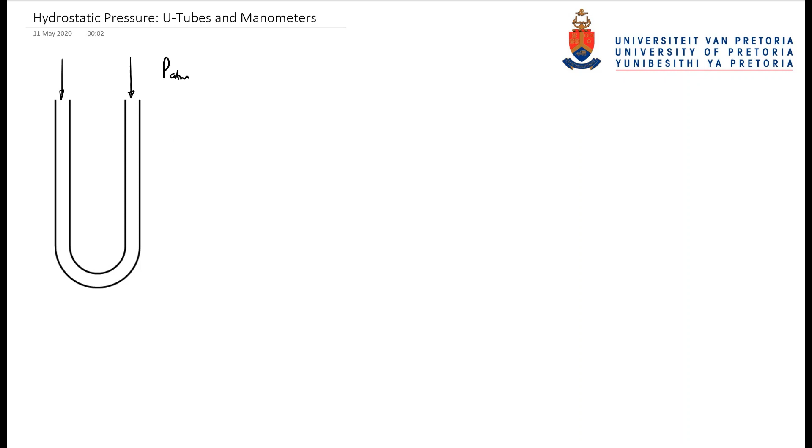So I could calculate here P gauge or P absolute, depending on whether I add the atmospheric pressure to the system or not.

So let's look at a closed manometer. Let's draw a closed manometer. I still have the atmospheric pressure, but I have a pressure inside the closed off end. There is still the pressure working into the manometer on the right hand side, or the right hand side leg of the U-tube.

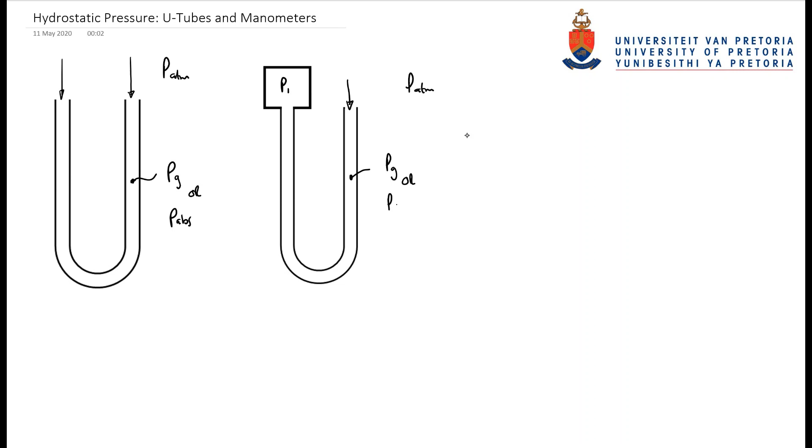If P1 is now given as a gauge pressure, for me to get the absolute pressure at P1, I need to add the atmospheric pressure. And for me to get the gauge pressure anywhere in the system, I can just do my calculations. But to get the absolute pressure anywhere in the system, I need to add the atmospheric pressure again. So I can get the gauge pressure or the absolute pressure anywhere in the system.

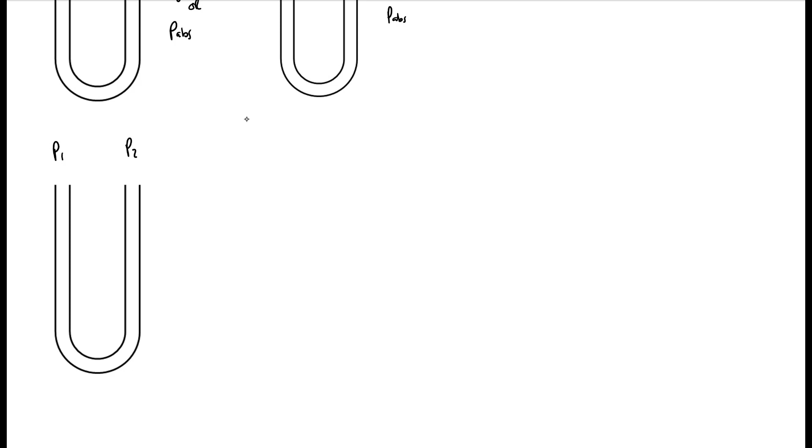Here we have a U-tube open on both ends. So for this system, let's assume on the left-hand side we have P1 and on the right-hand side P2 working on the system. We have an atmospheric pressure on the outside. In this U-tube, we now have a fluid that is at this exact height.

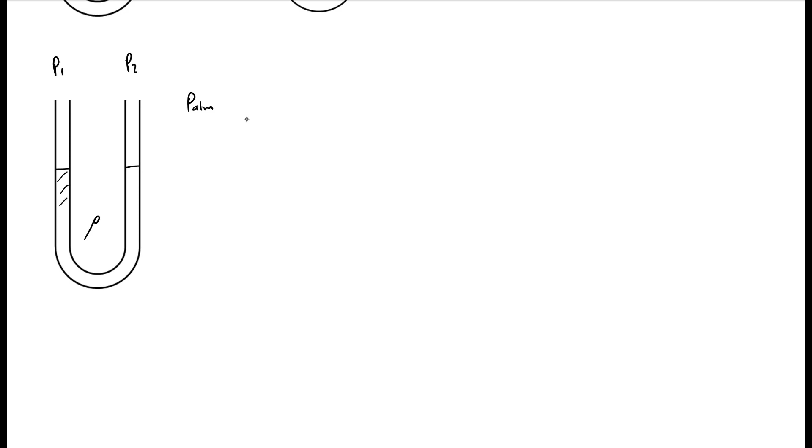The density in the fluid we refer to as rho. So there's my fluid with density rho in this manometer, and the height on the left hand side equals the height on the right hand side, and from where the fluid level is to the bottom we call that height H, and we want to know the pressure at the point right at the bottom, and we call this pressure P. Let's talk a little bit about the U-tube or the manometer before we start doing anything else.

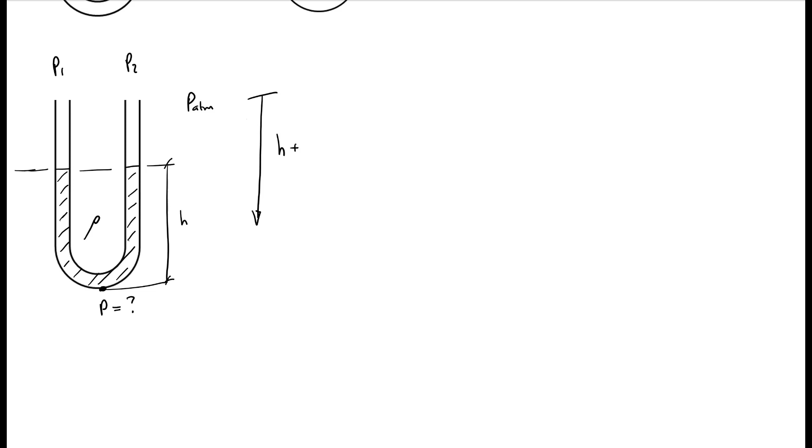So when we talk about pressure in a manometer or hydrostatic pressure as a whole, we always take the downwards direction as the positive H direction. This means that H will start at the top of the system at 0 and go down and be positive, which means that the pressure here would be gauge pressure 0. And as we go down and H increases all the way from 0 to the total length H, the pressure will increase with the rho GH equation we did last time. So this implies that the downward direction is also the direction in which the pressure increases.

Now for this specific system, if we're going to talk about the pressure at the bottom of the U-tube and calculate that, we're going to start there and calculate the pressure as we go down with the equation. So P will be equal to rho GH.

But my question now is, is this H on the left hand side or H on the right hand side? And that's actually very easy - it's both. Because both the fluids on the left and the right hand side is the same fluid with the same density, and because the left and the right hand side has got the same height, the two pressures are the same. Now that's easy to understand.

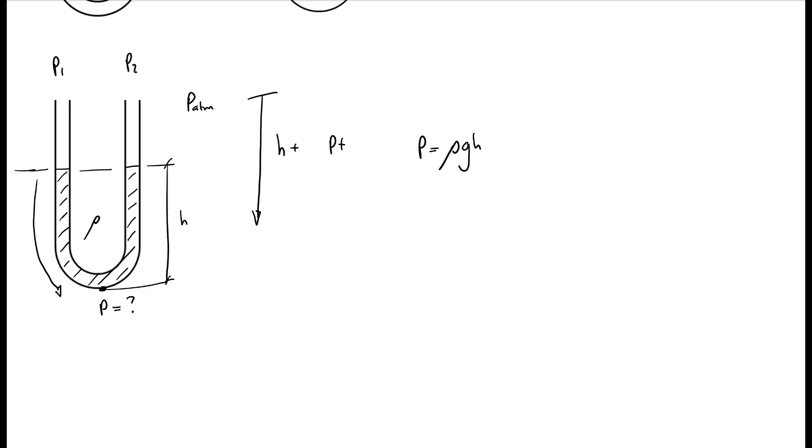What we can take from this is, when we want to calculate the pressure at the bottom, it's basically a balance of what's happening down the left hand side versus what is happening down the right hand side. So we balance the pressure whether it's on the left hand side or the right hand side to the bottom. In this case it's easy to understand because we've got the same fluid, they're the same heights, and everything.

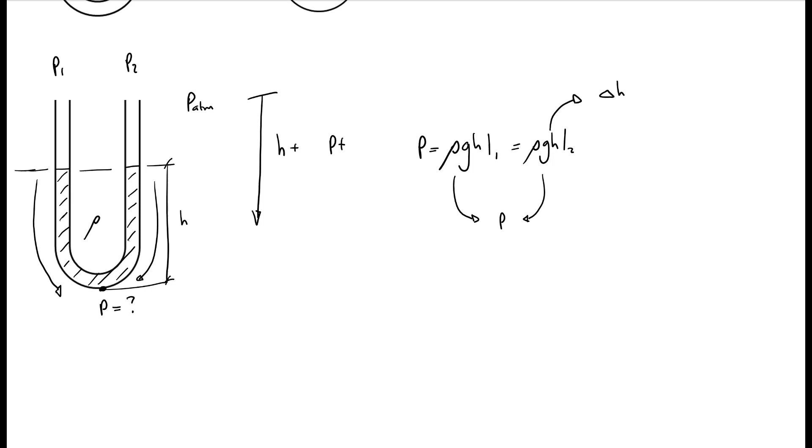So this is the same for the left hand side, it's the same as rho GH for the right hand side, which means that whether we start from the left or the right hand side, the pressure at the bottom P is exactly the same. Remember again, this H is actually delta H going from 0 all the way down to the bottom. So the pressure on the left hand side and the pressure on the right hand side, generated by the hydrostatic force of the fluid, is the same thing at the bottom, and they must be equal.

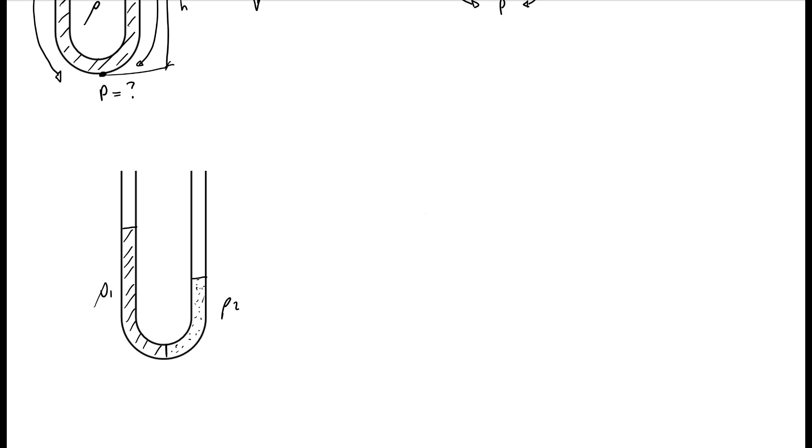Let's look at a system with two different fluids in it. We have a liquid from the top straight to the middle, and another liquid from there to the bottom. This is my first fluid with density rho 1, and this is my second fluid with density rho 2. We want to calculate the pressure at the bottom, so we have heights in the system: on the left hand side H1, on the right hand side H2. Both systems are open to the atmosphere, so we have atmospheric pressure on the outside.

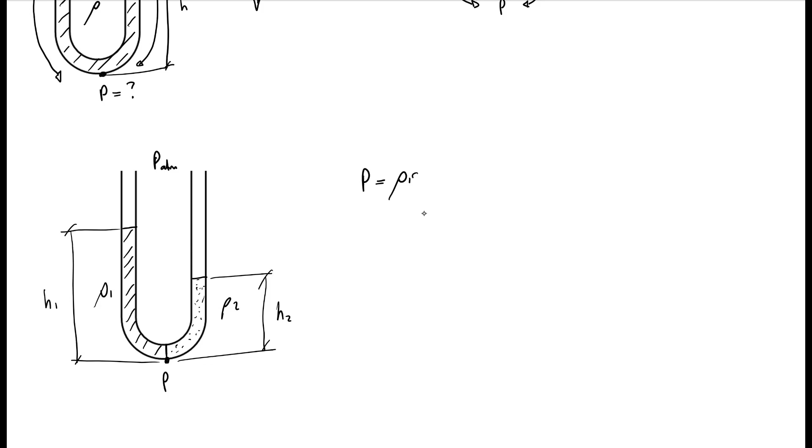Let's look at this system. To calculate P at the bottom, there's some hydrostatic pressure generated due to the fluid column on the left, increasing as we start at the top going down. We can calculate that by saying P at the bottom equals density 1 multiplied by G multiplied by height 1. That gives me the pressure at the bottom.

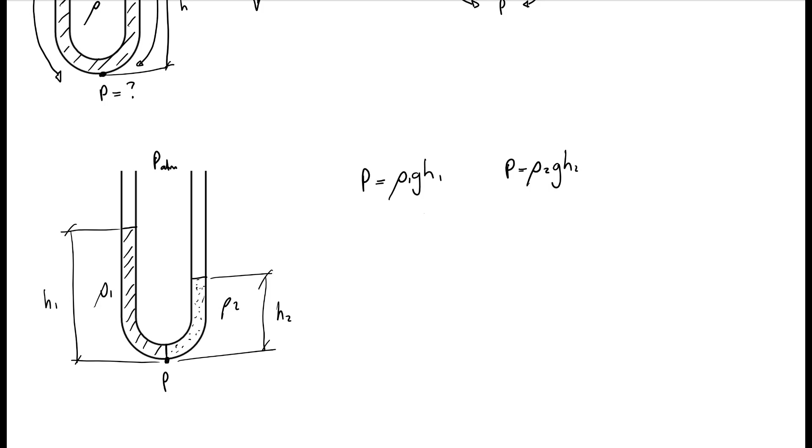We also know that the pressure at the bottom, if we were to start on the right hand side, is equal to the density of the second fluid multiplied by the gravitational constant multiplied by the height of the second column. Thinking of our first example where the two fluids had the same density, whatever happens on the left hand side is happening on the right hand side. These two forces should balance, meaning the pressure at the bottom is the same whether I'm coming from the left or the right hand side. It is still a balance, irrespective of the fact that H1 is bigger than H2.

The only thing we know is that because the total product of rho GH for side 1 equals rho GH for side 2, as H is bigger here, rho 1 should be smaller than rho 2, and that's how this system will balance — the product of H2 rho 2 must equal the product of H1 rho 1, remembering G is a constant on both sides.

The other thing to remember about this system is that this P we just calculated is a gauge pressure. If we want the absolute pressure, we need to add the atmospheric pressure to get the absolute pressure at the bottom of the system. So this calculated pressure is the gauge pressure; if we want the absolute pressure, we must add the atmospheric pressure on both sides.

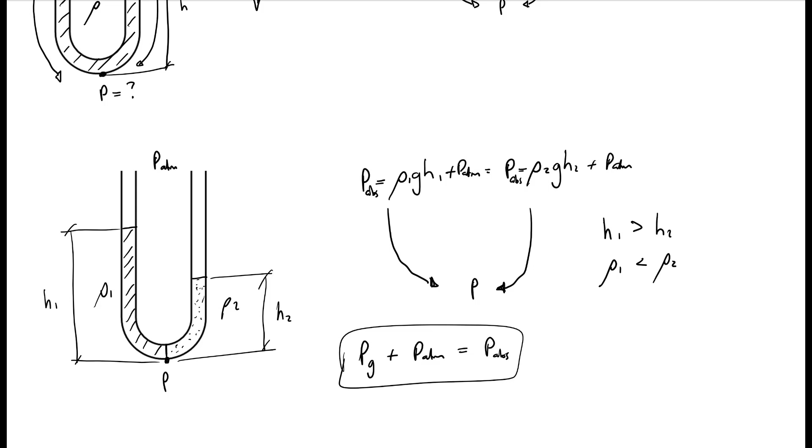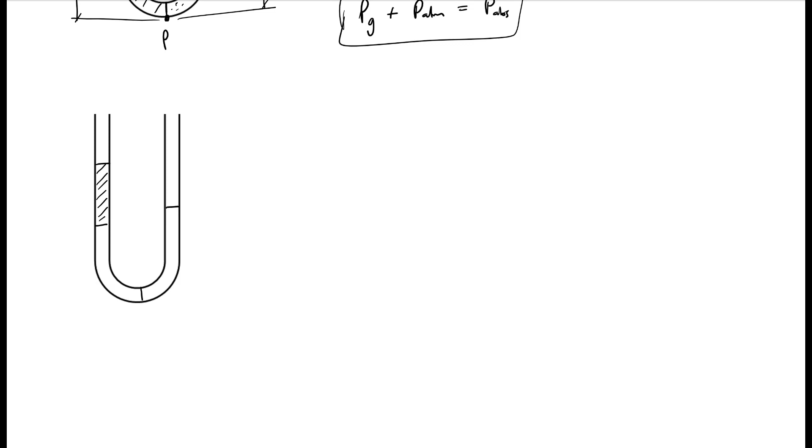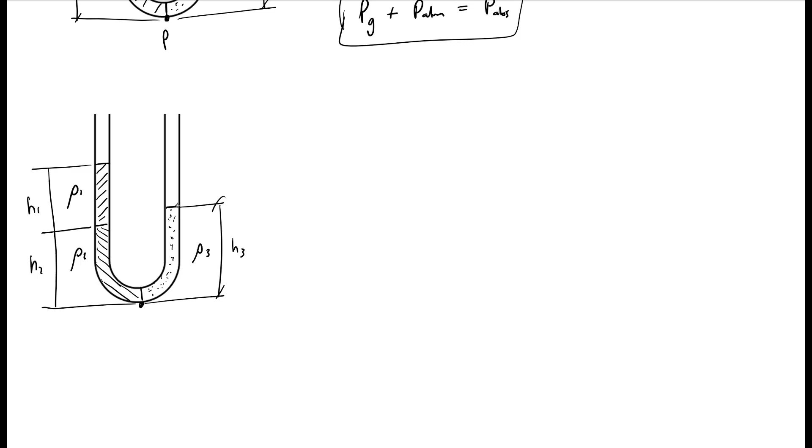Now let's look at a system where we have more than two fluids, with more than one fluid in a specific leg of the U-tube or manometer. Let's say we have fluid 1, fluid 2, and then a third fluid. There we have fluid 1, here fluid 2, and there fluid 3, with densities rho 1, rho 2, and rho 3, heights H1, H2, and H3, and again we have atmospheric pressure on the outside.

So what is the pressure now at the bottom? I'm also going to ask, what is the pressure there? Let's look at calculating the pressure at the bottom. By now you know that we have a balance on the left hand side and the right hand side of the U-tube, so the pressure going down this way must equal the pressure going down this way — it is balanced out. So let's calculate the pressure going down the left hand leg.

The pressure is rho 1 G H1 plus rho 2 G H2, and this is the pressure at the bottom. Because it's balanced, we know the pressure at the bottom, PA, will also be calculated as rho 3 G H3. Remember, this is a gauge pressure — if we wanted absolute pressure, we would add the atmospheric pressure on both sides. I'm going to stay with gauge pressure for my calculations for now, just to keep things simple.

So there we have it — we have our balance on the left hand side and the right hand side getting to the pressure at the bottom. But what about the pressure at point B? Can we calculate it from the left and the right hand side? The pressure at point B will be rho 1 G H1. We start at the top and do the hydrostatic calculation from the top, positive H direction all the way down, and now we have the pressure at point B.

Can we calculate it from the other side? Yes, we can — we must just remember one thing: this is the positive H direction, which means that is the negative H direction.

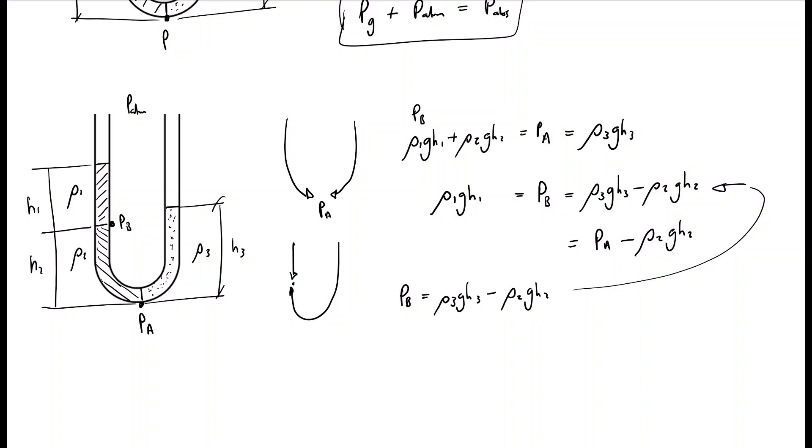So yet again, this is a balance, but in this case the balance is done like this. For the next system, I'm going to look at a manometer connected to a tank with a certain pressure in it. So let me draw again, and voila, there we have a U-tube manometer connected to a tank.

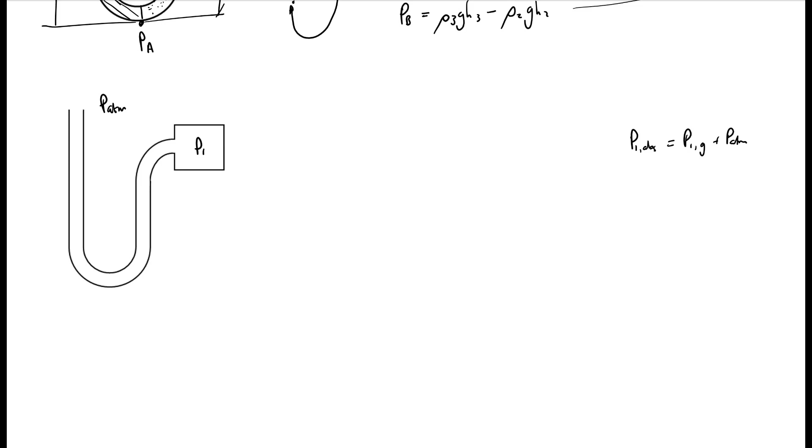So we have this system open to the atmosphere. In here we have a pressure P1. P1 absolute equals P1 gauge plus P atmospheric, remember, same as we did before with the gauge and the atmospheric pressure. So whether I refer here to the gauge or the absolute pressure is irrelevant, as long as I remember that I can convert P1 with any one of the subscripts to the other one by adding the atmospheric pressure to the gauge pressure.

In our system now, we have a fluid 1 that sits with these two heights. So let's call this H1, call this H2. Density, single fluid, let's call it density 1. We can now go and say that there is still a balance in this U-tube due to pressure.

What we have here is some sort of volume filled with a gas. So there we have a volume, a tank, filled with a gas, and the pressure in the gas we know is the same everywhere. So whether I'm inside the tank or down this leg of the manometer, the pressure is the same. So I can say that the pressure here is P1 as well. On the other side, I have the atmospheric pressure pushing down, and I have the head of liquid. If I want to calculate the pressure at the bottom, I know that the pressure at the bottom is now equal to, on the left-hand side of the manometer, rho 1 GH1.

And on the right-hand side, I have the pressure due to rho 2 GH2, height of fluid, but there is a pressure pushing on the top there as well, so it is plus P1. So from this, we can actually see that the pressure in the left leg equals the pressure in the right leg. And in the right leg, we have the hydrostatic pressure due to the column of fluid, plus this P1 working on top of that fluid.

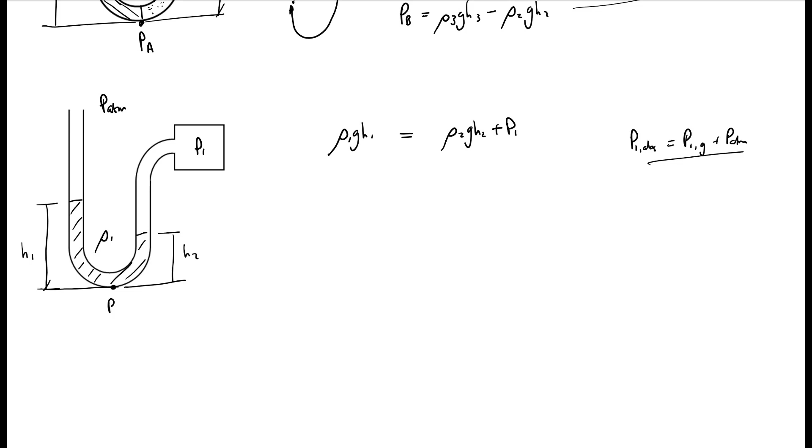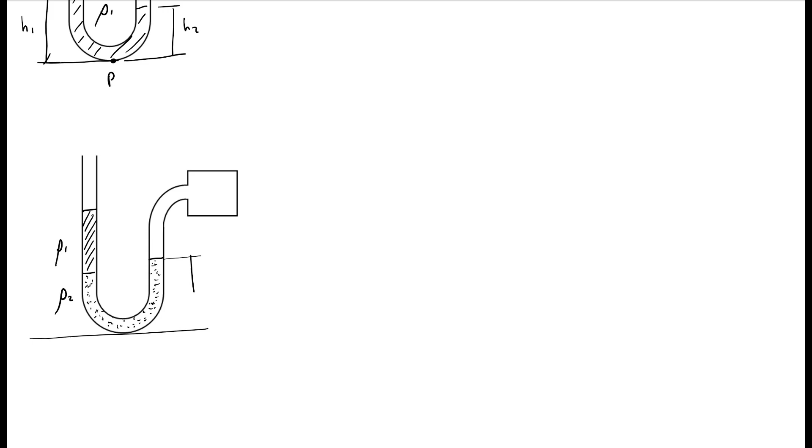So what happens if we have the same system, but with more than one fluid? Let's take this example now. In the system, let's say the first fluid starts there till there, and the second fluid sits all the way to there. So here we have fluid 1 with rho 1, and fluid 2 with density 2. Let's call this H3, we call this H1, we call this H2, and the pressure in this vessel, in this tank, we call that P1.

So we know that rho 1 GH1 plus rho 2 GH2 equals rho 2 GH3 plus P1. So you can see there's no real difference between the examples. We just keep on balancing one leg of the manometer to the other leg of the manometer.

I can also go and calculate the pressure at this point A by saying rho 1 GH1 equals PA, and this will be equal to P1 plus rho 2 GH3 minus rho 2 GH2. And I could simplify this as P1 plus rho 2 times H3 minus H2. So you can see that anywhere in the system I could actually go calculate the pressure.

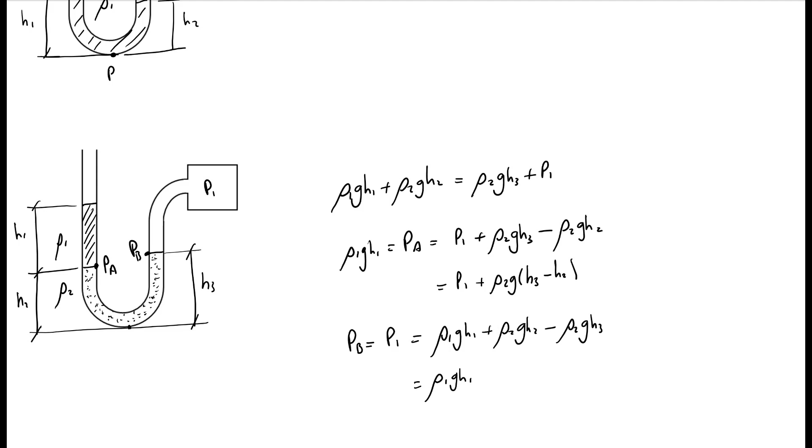I could also calculate the pressure here, let's call this B. PB equals P1 equals rho 1 GH1 plus rho 2 GH2 minus rho 2 GH3. I could simplify this as rho 2 times H2 minus H3.